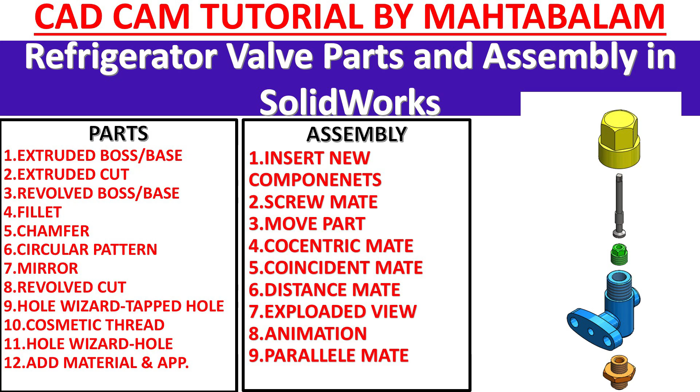In this tutorial, we are going to create an assembly of a refrigerator valve. We will create each and every part and assemble at the end, and we will also do some exploded view animation in SolidWorks.

Let's make the assembly of the refrigerator valve in SolidWorks. This is the assembly. We will create each and every part, and at the end we will assemble. We have 5 parts: body, valve seat, spindle, gland, nut, and cap. So we will start with part 1.

All dimensions are in millimeter. Part 1 is the valve body. We have one view, then a section view, section AA. You will see the direction. Then this is the back view.

So we will start to create this first. Let me make this upper body. This outer diameter, how much? Here you will see 20, and you will see distances 0, 18, 32, 44. So these lengths total 44. If you observe from here, total length is 64. So 44, and from this point to here, 20.

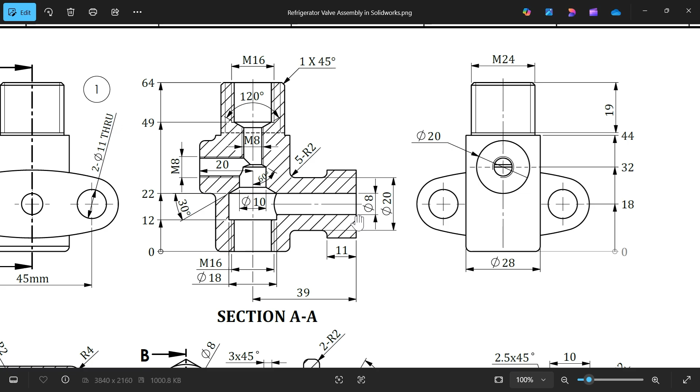So we will create with the help of... then on the back side we will extrude this one. Which one? This one, 20 diameter. You will see the gap from the center line is 20. And distance 0 to 32, see, then let's do this first.

Now, front plane sketch, we will use the revolve boss base feature. Straight, little step, and connect. Press escape key to get out. Make this line a center geometric line.

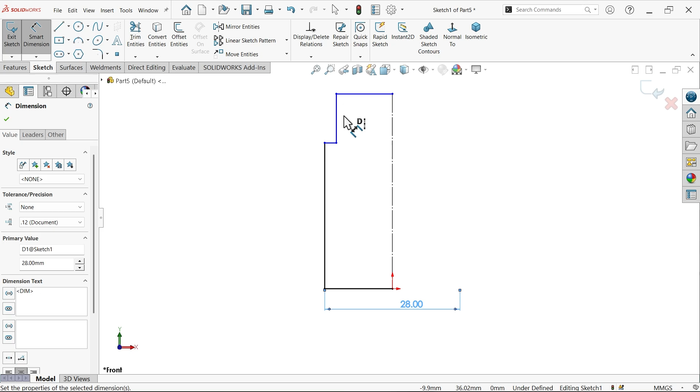Now let me define. If I keep it outside, it will show you the diameter: 28. Similarly for this one, 24. Now the total length shows 64. Now this length is 44.

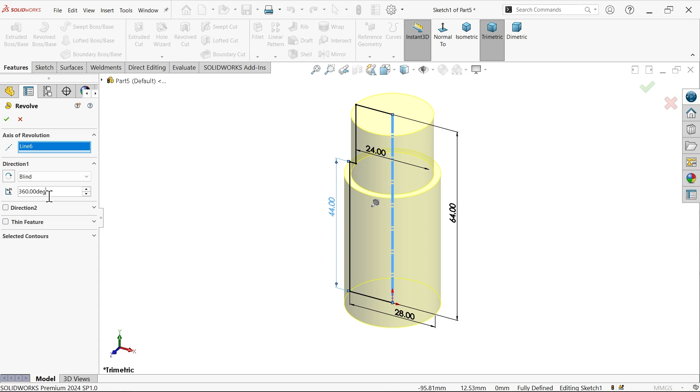Now let's go to feature and activate the revolve boss base feature. I want to add material. Due to this construction line, this profile is open, so we have to choose yes. The system asks, would you like the sketch to be automatically closed? Say yes. Now look, by default the system took this center line as the axis of revolution. Now we are going to add material complete 360, so here you have to apply 360 degrees. Direction, anything.

Okay, now let me uncheck real view. Front plane, sketch, circle. Now here we have a 20 diameter circle. Smart dimension: 20, and distance given 32. Look, the drawing is still not defined, meaning we have to apply some more constraints. So select the center point, hold shift key, select this origin point. Now let's make this vertical.

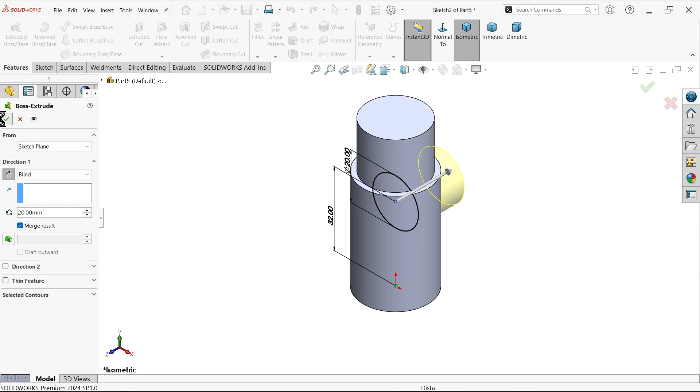Go to feature, extruded boss base. Now here I want to add material. This length of material is 20 millimeter, but I am going to add it on the reverse side. So see the arrow, just click reverse direction. See, the material moves to the back side.

And after this we have to add, see, there is one threaded hole, M16. Now let's first create this one, 18 diameter. See this diameter, distance 0 to 12, 12 to 22. Then there is one tapered view, 30. Now this one is 10, this is important.

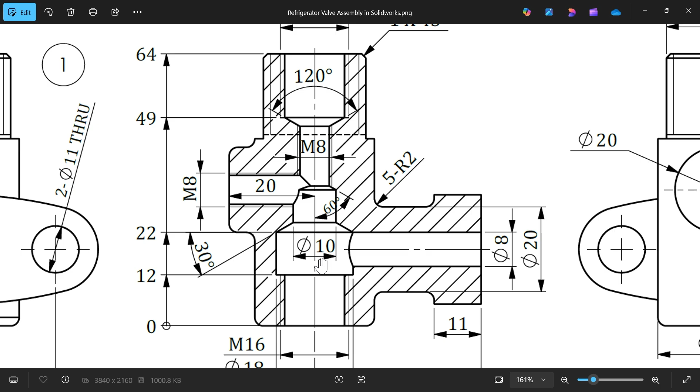Okay, then one more thing here, M8, and this is 60. For M8, this is ISO standard, so 6.8 mm hole for M8. If you want to create the first hole, then we will create M16.

Okay, let's create a plane. First reference, choose front plane. Now apply distance 39. Okay, now select plane one, sketch. Now I am going to first draw a center line.

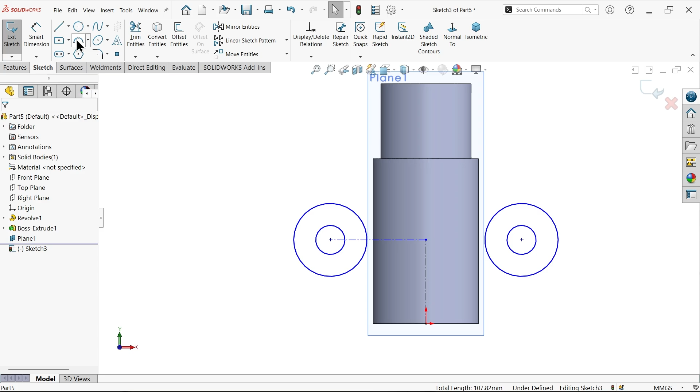Now activate circle, let me draw two circles. Mirror entity, now select both circles, make sure you selected copy, mirror about this one. Now again select here 3-point arc, connect this one to this one, press escape key to get out.

Now make relation: select this arc and select this circle, tangent. Similarly do this side: select arc, circle, tangent constraint. Mirror entity, select this entity, make sure copy, and select this line. Now do one thing, trim entity, power trim and trim this one. This is an unnecessary line, we don't need this. Now we have a structure.

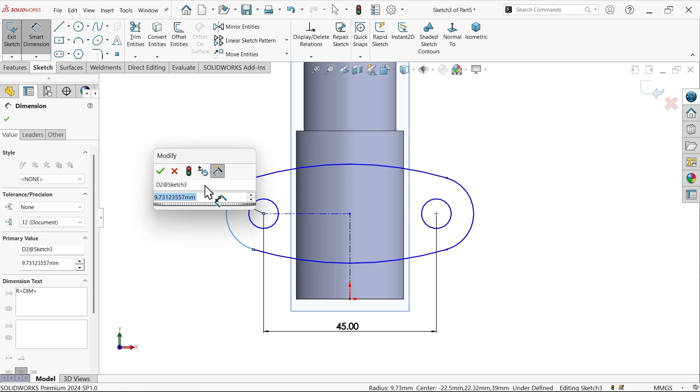Let's apply dimensions. First center dimension 45, outer radius 10. Now length 18 millimeter. Now this one 100 millimeter, 11 millimeter. Look, the drawing seems fully defined.

Go to feature and activate extruded boss base because I want to add material. Now look, this is important: the material is going the wrong side, so reverse. Here apply 11 millimeter. Say okay.

Now select hide. Okay, this diameter 20 we have to add with this, then we will create this one. I am going to select this face, sketch, circle, smart dimension, the diameter goes to 20 millimeter. Now we have to apply a center line: select the center point to this, press escape key to get out. Now select this one vertical, select this line horizontal. Look, it seems fully defined.

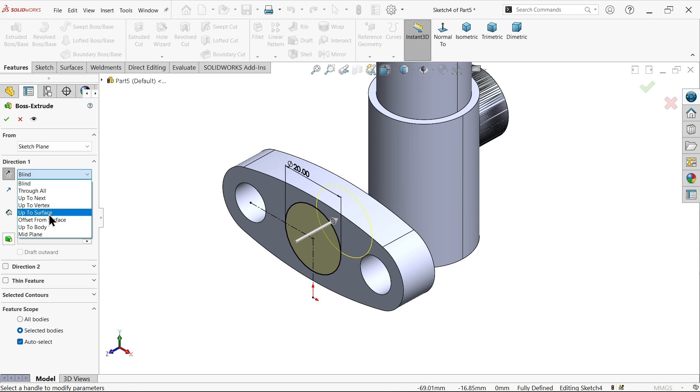Extruded boss base. Make it reverse, and here I am going to choose up to surface. Select this body. Okay, look.

Now I want to add some hole inside. So which plane? Right, front plane, sketch. Let me add one center line across the midpoint to the origin point. Press escape key to get out, activate line tool.

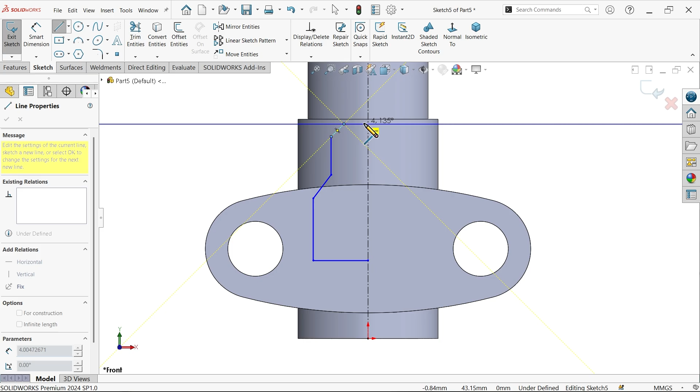Connect, exit. Now I am going to define this diameter: 18 millimeter. Similarly for this one, 10. And this hole going for M8, so for M8 in ISO standard, hole size is 6.8. Okay, that's fine. Now distance from here to here.

Now from here to here it's 32. Now let me drag down. Smart dimension. Now in drawing it's given angle 60.

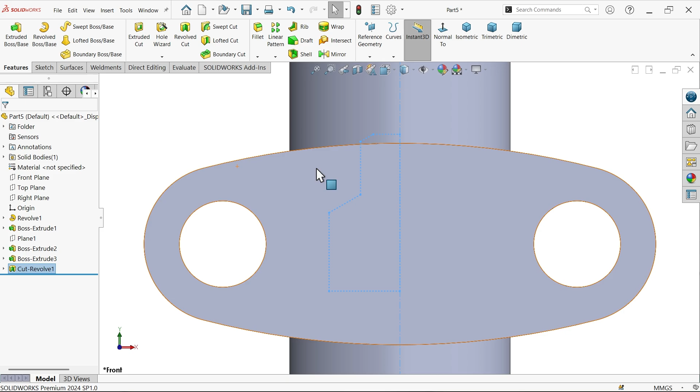Now let's activate revolve cut here. Due to this construction line we have to apply, yes, because I want to close this profile. Now you will see the preview. This center line selected as axis, and I want to remove material 360 degrees, a complete hollow. So, okay, if I am going to see front plane section view, okay, see the material is removed.

Now let's add hole from bottom to next, M16, and from top M16, but depth of hole you will see here. See, 19 millimeter is the thread depth. Oh, not 19 millimeter for this one. You can calculate from here: 15 millimeter, 49, 64 minus 49, 15 millimeter.

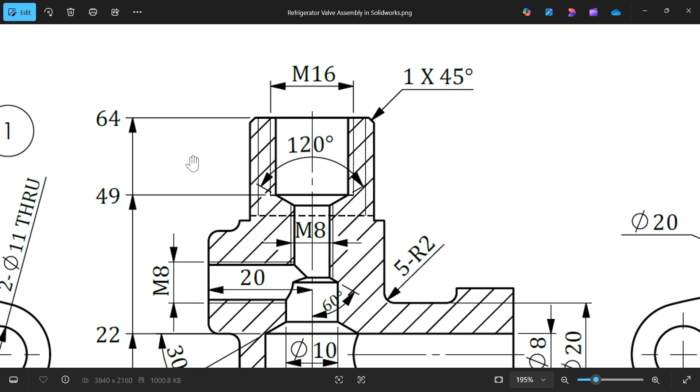Go to hole wizard, here choose straight tapped hole. See, straight tap, ISO standard. I don't want to make a throughout hole, so I am going to keep bottoming tapped bottoming hole, and here I am going to apply M16. We don't have clarification on pitch, that's why I am going to choose. Now here make sure angle keep 120 degree.

Now this is going to be, let's say, next, with thread call out. Position, select this face and place here. Press escape key and just rotate and see the preview. Okay, now let me see. Okay, now this is available.

Now let's come here. Again hole wizard. Now same hole, ISO standard M16, but here we have to apply depth. Keep end condition blind and depth here 15 millimeter up to shoulder, not up to tip. And this is thread. Thread how long? 15, same.

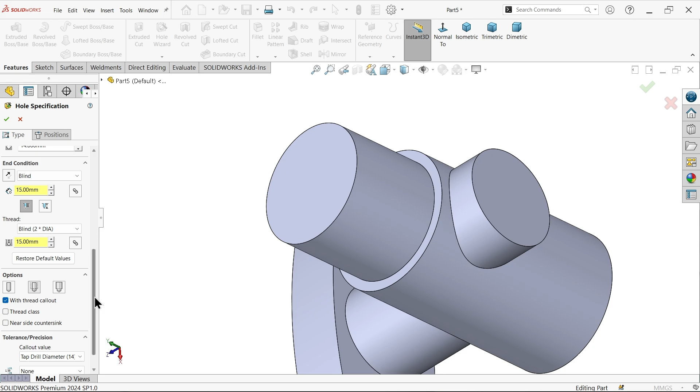At bottom with thread call out, it will show you cosmetic thread. We will see. Okay, position, select this top face. Place at center, press escape key. Okay.

Let me do one thing: section view. Okay, see, now these holes created for M8, so we will apply thread here. Hole wizard, ISO standard tapped bottoming hole. Here I am going to choose M8.

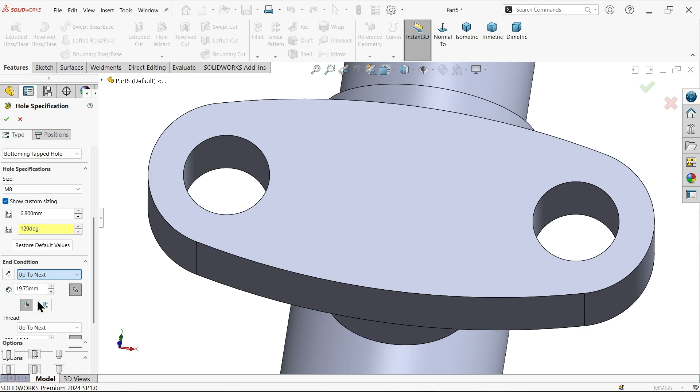Keep angle 120 degree. Now this is going to be next. Position, now from enter from bottom, select this. Now place at center, press escape key to out. Now let's say okay.

Options, document property and detailing. Shaded cosmetic thread, image quality, okay it's already higher. Now front plane section view. Okay, keep color.

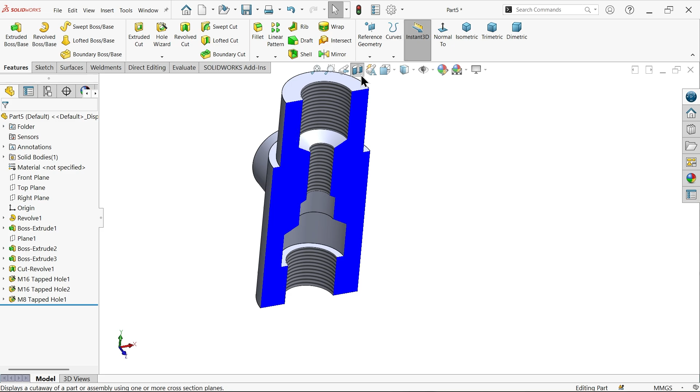See, we applied threads all over. This is what we need. Exactly. Now we already applied hole. Now you will see there are radius in 5 corners: 1, 2, 3 and this one. And there is a chamfer, 1 into 45 degree. Okay, and here one 8 diameter hole up to this, and similarly M8 thread up to this.

Now select this face, sketch. Now here we have to create a hole, only hole, not threaded hole, simple hole, M8. Okay, if I'm going to, which one? Now see, this is sketch to show.

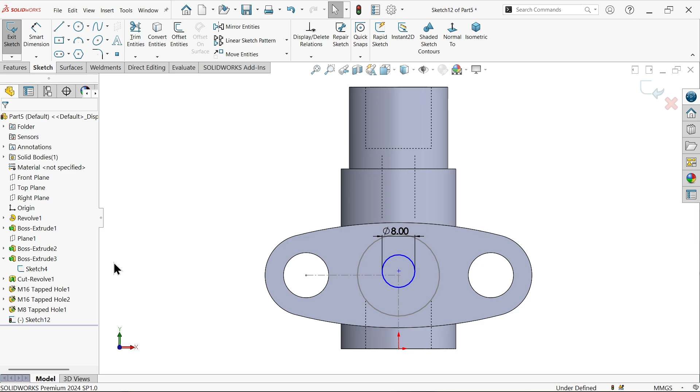Look, we already created some, so select this center point and this one, coincide. Look, this is fully defined sketch. We just use previous sketch, sketch 4, because this is exactly at the center of this line. Now you can hide, click this sketch, hide.

Go to feature and activate extruded cut, because I want to remove material. But how? Here choose in direction up to next. Up to next means this is going to cut only up to the inside wall.

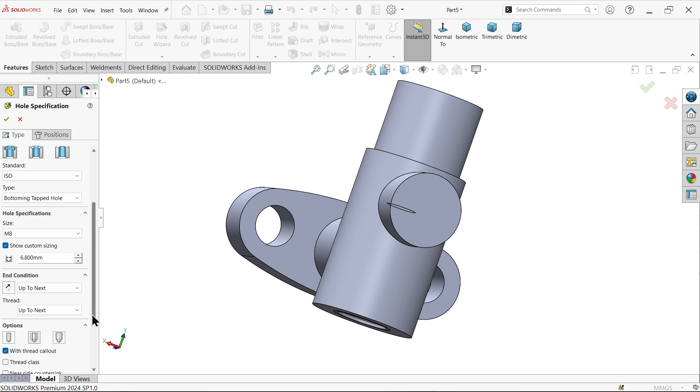Okay, let me add here hole also, hole wizard. Tapped straight tab, ISO standard bottoming tapped hole M8. Position, select this face. We have to place at center. Press escape key to out. Just look at this, okay, this is going up to.

Okay, now which plane? Right plane, section view, normal view. Okay, look, we added one thread from here, we added hole from here. Now our job done.

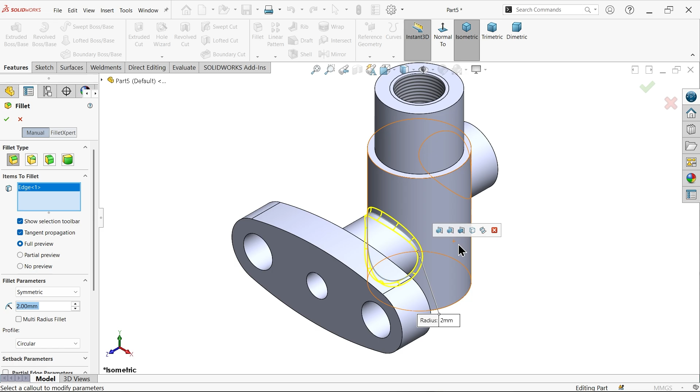Simply add fillet, fillet type constant size, radius 2 millimeter: 1, 2, 3, 4. Okay, this corner also have radius 5.

Similarly, chamfer. For chamfer type, angle distance, the first one. Now here 1 into 45 degree, and I'm going to select this corner.

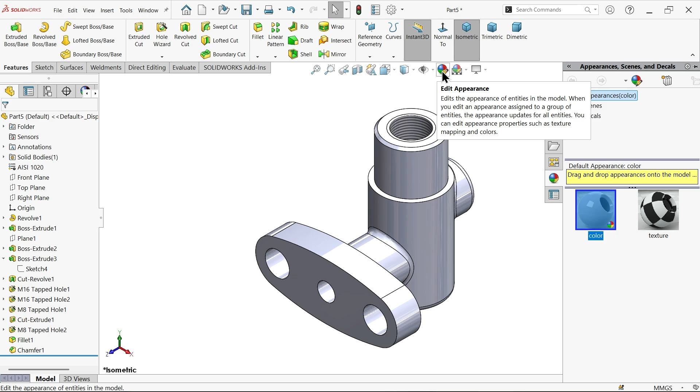Now material, let's say it's given, edit material, steel AISI 1020, apply, close. See, but I'm going to add some different color, so edit, and let's say this one.

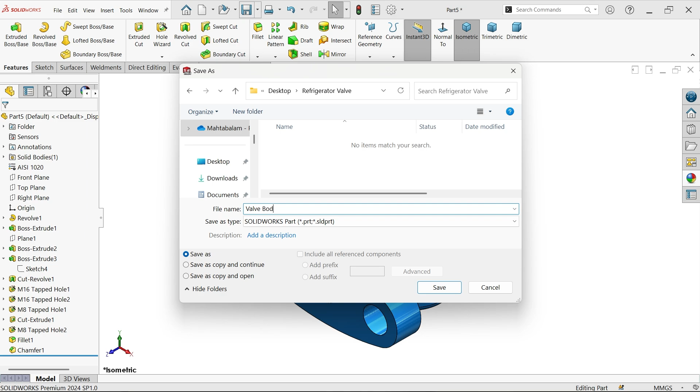Okay, that's fine. Okay, now let me save this one. Go to desktop, create new folder, refrigerator valve, enter. This is part 1, valve body. Let me save here. Now let's make part 2.

Which one is part 2? Part 2 is the bottom one. This is called valve seat. Okay, this is the part 2. Let's try to create all body together. 28. Okay, I'll tell you how. From 0, 15, 21. This way we can apply dimensions.

32. Now this one 16, so outer diameter 16. This is also 16. 28, this is hexagon shaped diameter. Then throughout there is 8 diameter hole, at end 120 and hole depth 10, diameter 10. Then there is a chamfer 3 into 45 degree. Okay, let's do it.

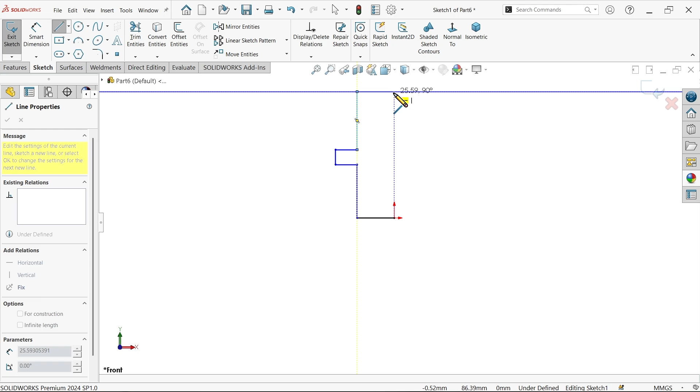New, here choose part. Now I'm going to choose front plane, sketch, activate line tool. Press escape key to out. Make this one center line. Smart dimension. 16 millimeter. Now total length given is here.

Let's use one more option. Now see here, vertical ordinate dimension. First you have to choose one base. So I'm going to select this one. Okay. The drawing actually is from this direction, so delete this one. We will start from here.

This is 0. The second option, double click and you can change the dimension. 15. Select this one, double click the dimension and you can say 21. And the last option, double click, 32. Select OK. Now choose smart dimension. This one I am going to make 35 because we need to cut one shape.

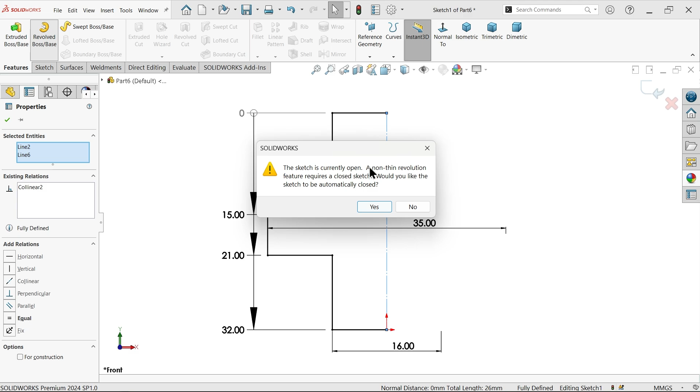Select these two lines, make relation collinear. Now I want to add, so activate revolved boss base. Due to this construction line the profile is open, so system asks, would you like to close? Say yes. By default, system took this center line as the axis of revolution. I want a complete circular body, so you have to apply a complete angle. Okay.

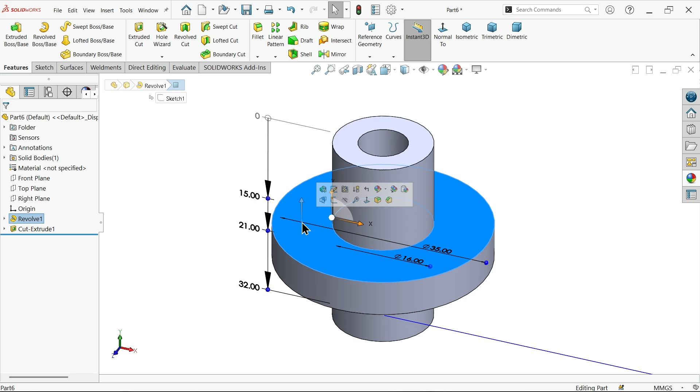Now hole 8 diameter, so select this face, sketch. Eight. Activate extruded cut. I want to remove material, so here I am going to choose either up to next or through all. Similarly, I am going to select this face, sketch. Now I am going to add polygon. Now add this material.

28. Now select this one, vertical. Extruded cut. Now select here, let me choose through all, and I am going to choose flip side to cut. See? If I select through all, the arrow moves this side, say okay. And here we go.

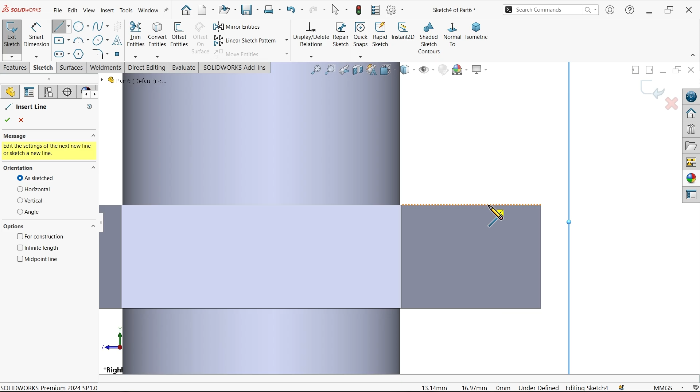Now, back side here we need to, let me check, right plane, sketch, activate line tool. This is 2 millimeter radius. Go back to the point and see the line is converted into arc. Now press escape key. Select these 2 points, vertical. Smart dimension, 2 millimeter. Center. See, there is a midpoint.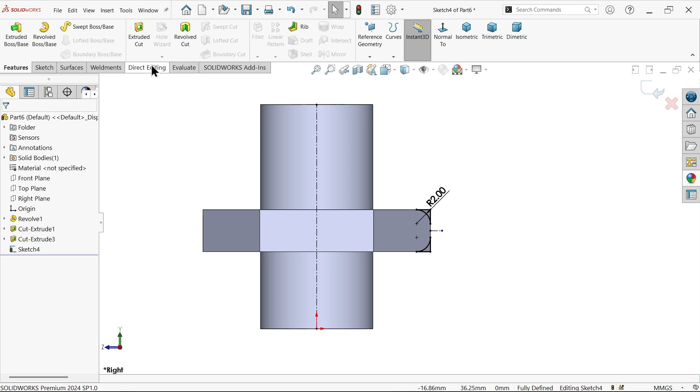Mirror entity. Now select all this. Copy, select this mirror line. Let me select one center line or midline. Activate revolve cut feature. Here I am going to select this line. I want to remove material complete 360, so you have to apply 360 and see. Oh no.

Here we have to apply thread, so we have to apply insert. Go to drop down and you will see annotations, cosmetic thread. Now here choose standard ISO, machine thread, M16. Blind depth 13. Now choose circular edge, so I am going to select this edge. Okay.

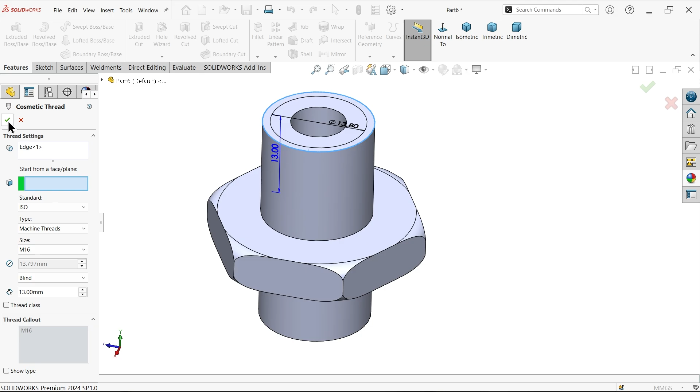I'm going to detailing. Quality also I'm going to increase; it will increase your file size, but image quality becomes good. See. Similarly, again annotations, cosmetic thread, select this edge, everything same, ISO standard, machine thread, M16. Now here depth given only 10 millimeter.

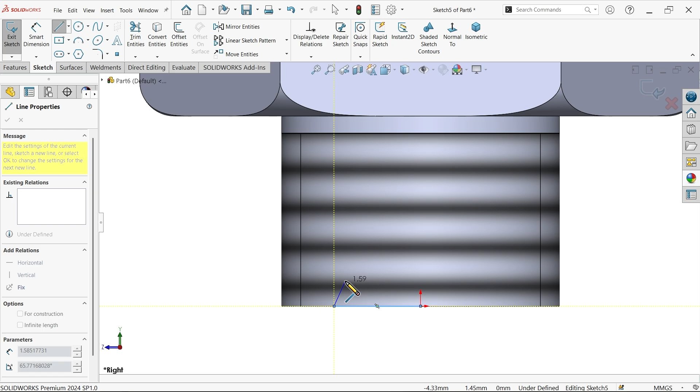Now right plane sketch. Here we need to create one hole. Select this point. Smart dimension. Diameter shows 10 millimeters, so radius 5. And total angle given 120, so this angle is going to be 60.

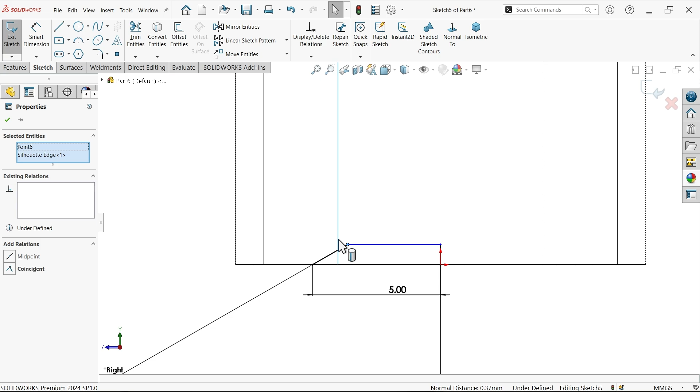Okay. Now this hole is going to match with this. So select this line and this one, coincident. See, it seems fully defined. Revolve cut. For axis, I'm going to select this line. See, complete 360 degree, axis already selected. That's it.

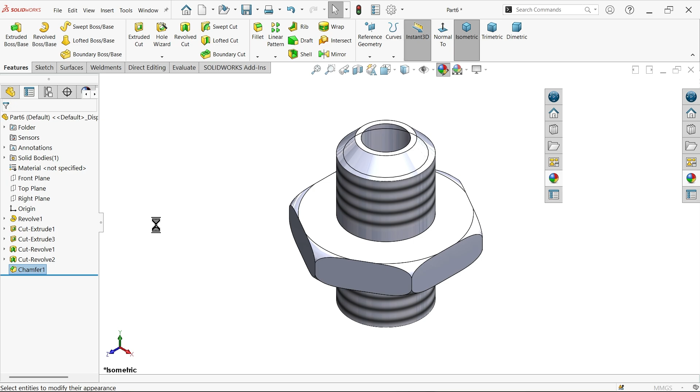Now top side chamfer 3 into 45 degree. Keep angle distance, tangent propagation, select this edge. Here choose part, select this one. Remove this chamfer. See, this is going to be fixed something like this, okay, that's fine. Let me save this one. Valve seat.

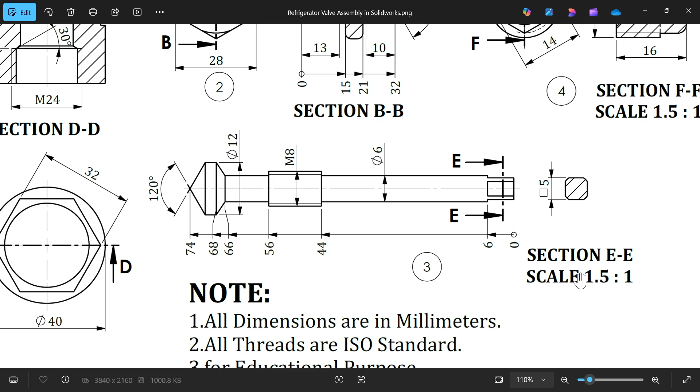New. Now let's make the third part, this one. This is the spindle, scale 1.5 compared to the others. Total length 74. There is one square, you will see this is section E. This is square, 5 square, up to 6.

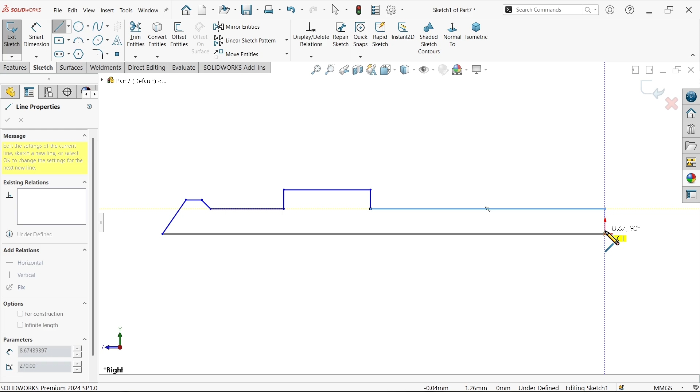Then this diameter 6. Then there is M8 thread here, 44, 56. Remember these dimensions. Then this corner 66, 68, 74, 120. This diameter 12. Okay, let's do it. Right plane sketch, activate line tool, start from here. Press escape key to out.

Let me make this center one construction line, smart dimension. Let me define first diameter. 6. For M8 thread, make it 8. Now this one 12. Now I am going to choose horizontal coordinate dimension. First this is the reference, so make it 0. Second one, double click, 44.

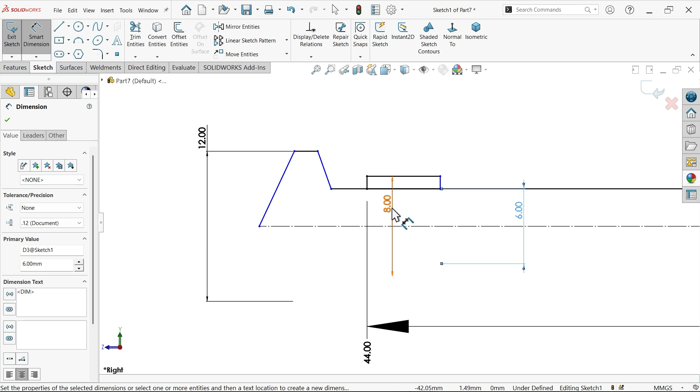Okay, this is not going to show properly. So let me drag this one. Okay, let's define this angle. Normal smart dimension. Select this point and this one. If you calculate, this is going to be 30 degree. Fine.

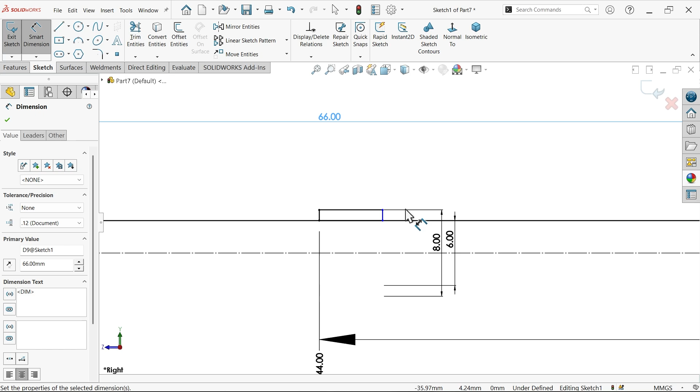Now distance from here to here, 68. From here, 66. Okay. Now let's move this one. Okay. Now the things go online. Now this one from here to here, 56. Okay. Now total.

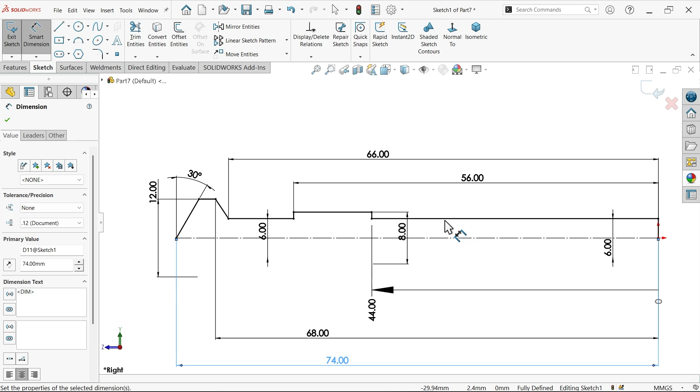Revolve boss base. Due to this construction line the profile is open, so you want to close, say yes. Center line, see this center line, construction line selected as the axis. I want to add a complete 360 body, so we need to apply 360 angle.

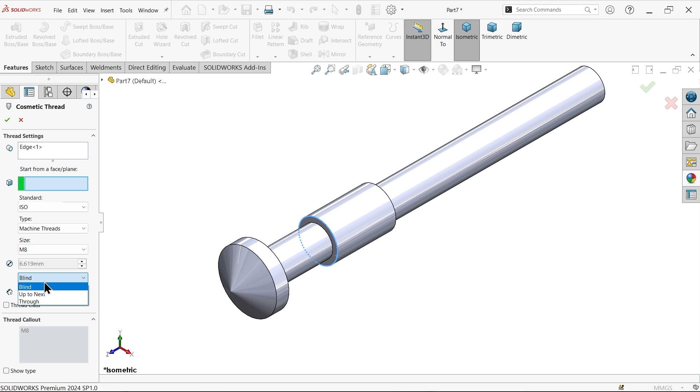See here, insert, annotations, cosmetic thread, ISO standard M8 thread. Now select this edge or choose next. If you don't see it, again go to options, document properties, detailing, shaded cosmetic thread, image quality, something like this. Okay.

Select this back, sketch. Now draw one circle, square. Press escape key. Now select both the vertical and horizontal line, make relation equal constraint. Okay. Smart dimension 5.

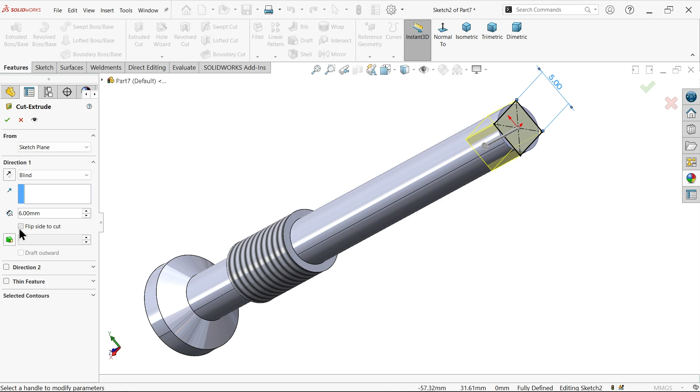Extruded cut. I want to remove material. Now here depth only 6 millimeter, but flip side to cut. You will see preview. See this yellow portion going to remove. See.

I want to add spindle valve. New part. Now what next? Part number 4. Okay, what is the name of part number 4? Gland nut.

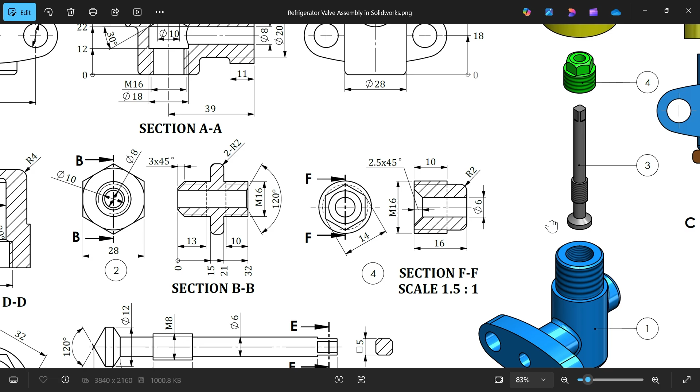Okay, this is M16, depth 10 millimeter, then total depth 16, and center to center 14. Okay. Then there is a hole 6 dia, chamfer 2.5 into 45, corner radius R2. Okay, let's do this.

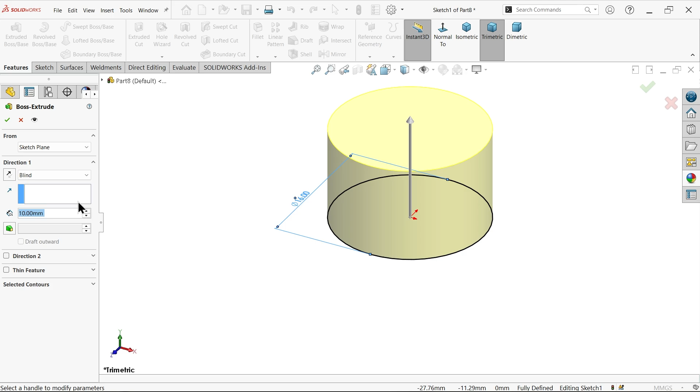Top plane sketch, activate circle, make it M16, 16 diameter, extrude total length 16 millimeter. Okay. Now from here a sketch, now the diameter 14.

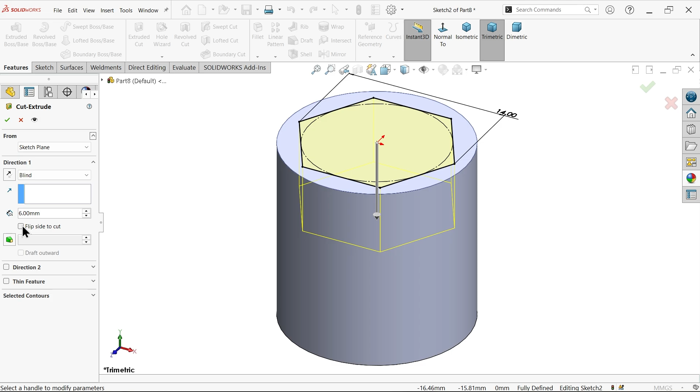Let's make this one horizontal. Extruded cut. Here keep end condition blind. Depth 10 minus, it's going to be 6. 16 minus 10, 6. Flip side to cut. Okay.

Let me select right plane, no. Front plane, sketch because there is a curve. So go back to the point and see the line is connected, become curve. Press escape key. Now let's make these 2 points vertical. Smart dimension 2 millimeter. Okay, I want to add only here.

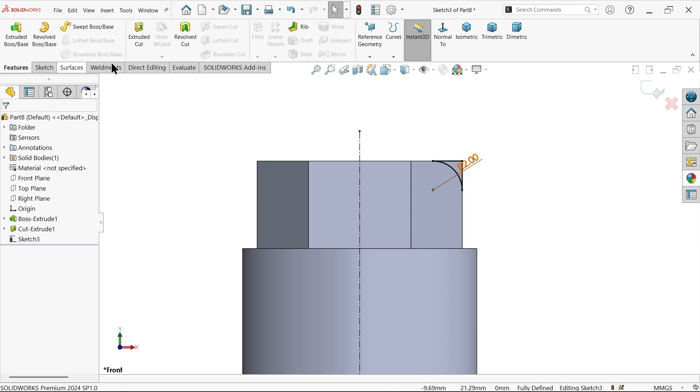So let me draw one center line. Center line, okay. Revolve cut. Now see, by default, system took this construction line as the axis of revolution and angle applied 360 degree. You will see the preview. See.

Let me make a hole. Hole wizard, keep customize, simple hole, ISO standard, drill size. Now from here you can select your hole. Six, up to next. Position, select this face, place at center, press escape key to out. Chamfer 2.5 into 45, select OK.

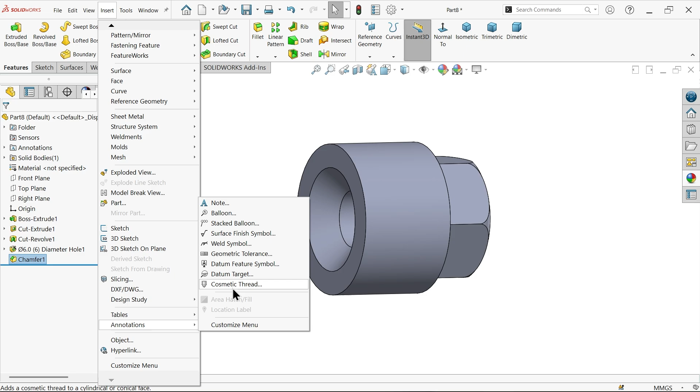Now here we need to add a thread, so simply go to insert, annotations, cosmetic thread, ISO standard machine thread, and here let me choose the size M16. Okay, keep next. Let me select this edge. Okay. This is gland nut.

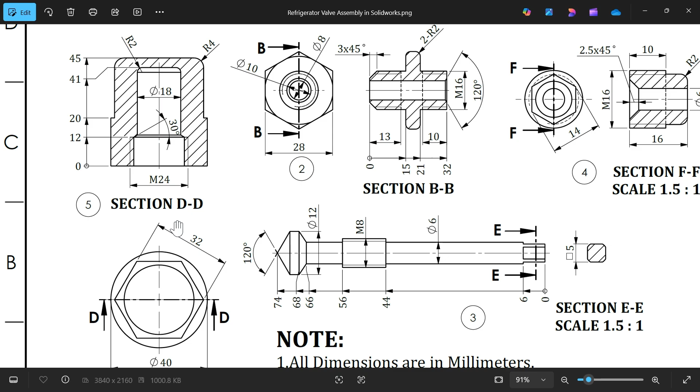New part. Now this part we've done. What is next part? Okay, this is the 5th part. Outer diameter you will see here 40. Okay. Now 12, 20, 41, 45. Total length distance from here to top 45. Okay. You will see here 32, 40. Okay, so we will make total corner radius R4.

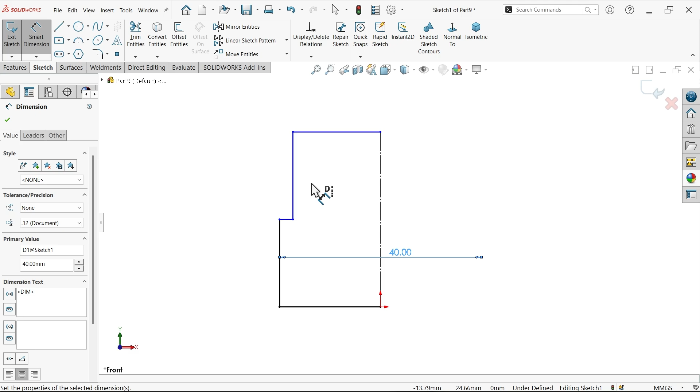Okay, do one thing. Let's try this. Line, front. Press escape key, select this line, make it construction line, smart dimension, keep diameter 40, and why we need to do this? Make it one only. That's simple. 45. I want to add material, close, yes. Revolve boss base, okay.

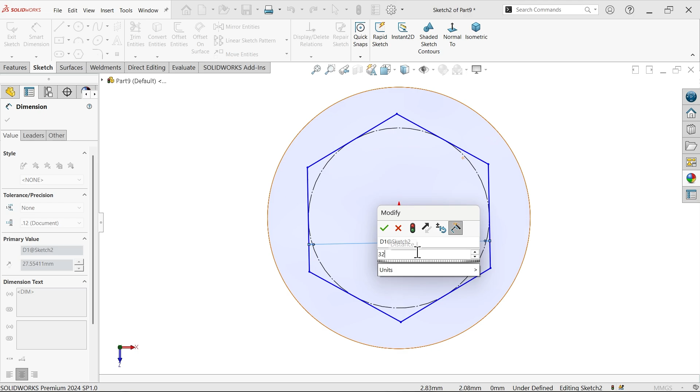Now select the top face, sketch, polygon, smart dimension, and let's make this one horizontal. Extruded cut. Now make it depth 25. Flip side cut. See, I want to cut outside material. You will see this arrow.

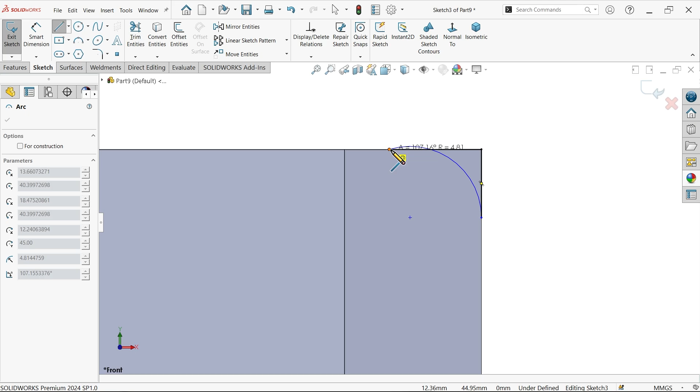Now, which one? Front plane sketch. Let's make corner R4. So activate line. Go back to the point and see the line is converted into arc. Close. Now select these 2 points, vertical, 4 millimeter. Okay. Now draw one center line. Mid line.

Feature, revolve cut feature. Look, by default system took this center line as the axis of revolution, and this is going to cut complete 360. You have to apply angle 360 degree.

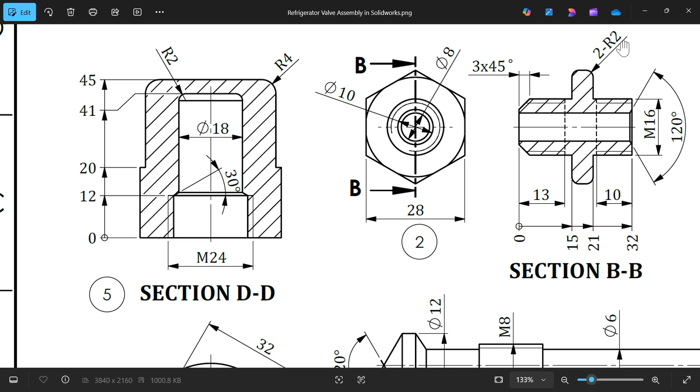Now let's make a hole here. M24, depth 12, thread also up to same, 120 angle, 18 dia. This is 41. Hole wizard, tap, ISO standard bottoming tapped hole. Here choose M24. Now depth here, select angle 120 degree. Okay.

Now 12. Thread also up to 12. Position, select this face, place at center. Press escape key to out and see the preview.

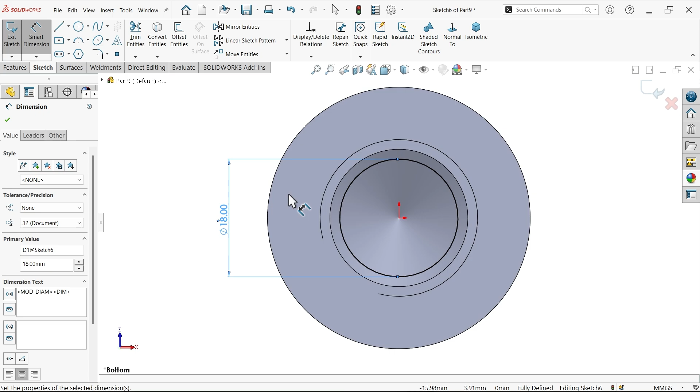Okay, select this face, sketch, circle, 18, and depth of this hole 41 millimeter. Keep end condition blind, depth keep 41 millimeter. Fillet, constant type fillet, here symmetric and radius 2 millimeter, and select the face or edge, no matter. Section view. Okay. Now see the preview, how it looks like.

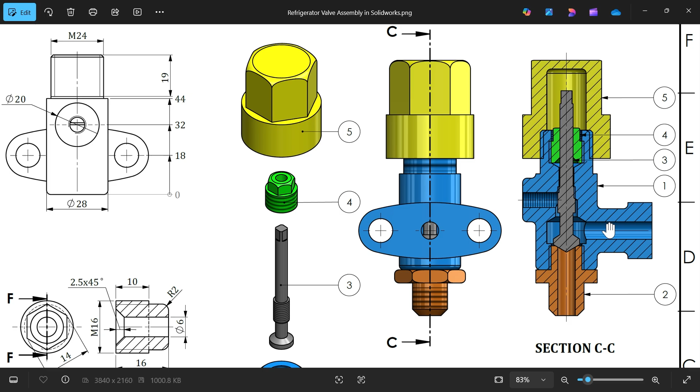Now yellow color. Now save this one, cap. Now see, this is the assembly. You will see part 1, part 2. See, the chamfer is going to be down, and this spindle is going to rest on this. There is a chamfer. Then we will apply this gland nut with this body. Okay.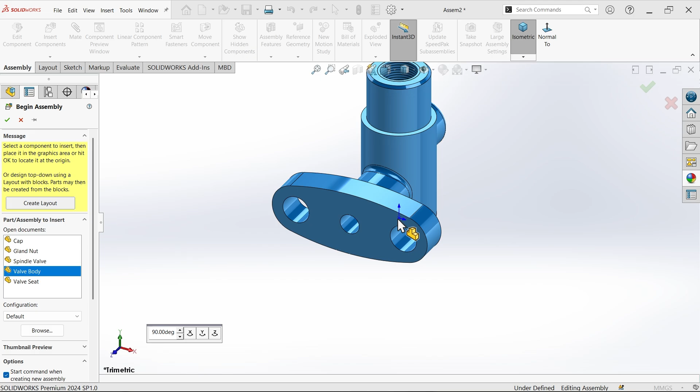Go to file, new, choose here assembly. Okay. Now drop down, and here I am going to activate view origin, because the first part I am going to fix here. So first part valve body. Now keep cursor and see, this is going to fix with origin. See, click. Now the first part is fixed at origin. This is important, otherwise you have to again set this reference or plane.

Normal view. Now let me hide. Now if you right click on part, see float, means this part by default is fixed. It is not going to move. Insert component. Now valve seat. Now see, I want to rotate this one because this chamfer part is going to be downside. So how you can rotate? You will see here X, Y. So click X. See, this is rotated. Again click X. See, this is rotated. Place somewhere here.

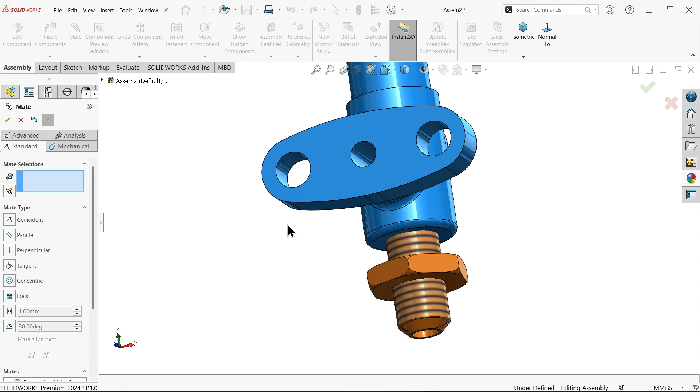Mate. Now select this hole and this one. Concentric relation. Okay. Now just drag. Either you can apply mechanical mate; we will apply mechanical mate on other parts. Simply I am going to fix with this coincident relation. See, now in drawing you will see this face similar to here. So select this face and this face, parallel. Okay, cancel. Select this one, normal view. See.

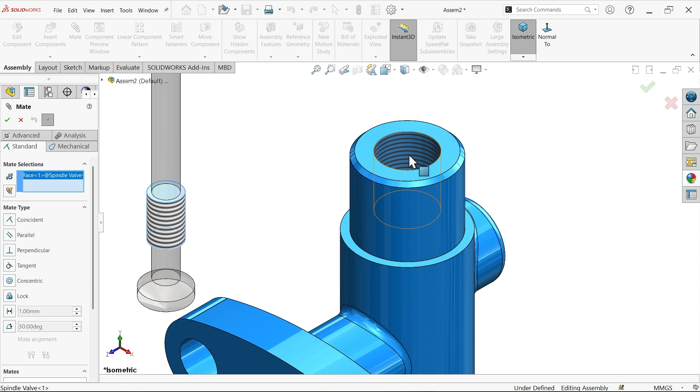Insert component. Now the spindle. Now I want to rotate, so X, click OK. Now I am going to choose mate. Select this one and this one. Concentric. OK. Now let me select section view. Front section view. OK. Now just down, and I want to fix this one here.

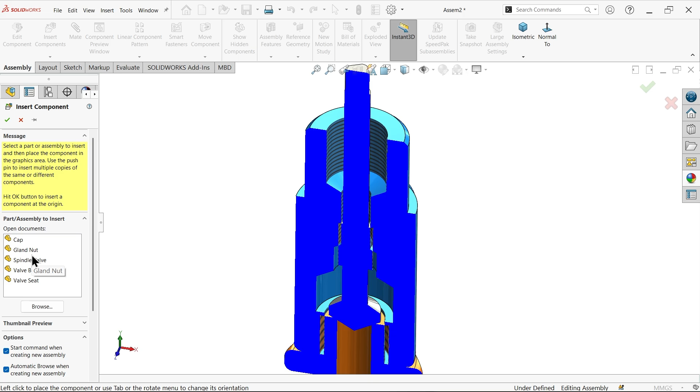Mate. Clear. Select this seat. This one and this one. Both going to fix coincident. Okay. For time being, I am going to fix this. Okay. Now insert component, gland nut. Place somewhere here. Okay.

Mate. Select this one. Oh, not this one. Clear. Now here I am going to apply some relations. Mechanical mate. Screw. Now select this internal and this one. Okay. 1 revolution per mm for the time being. Now go to advanced mate, limit. I want to fix some limit. This face, this face. Come down.

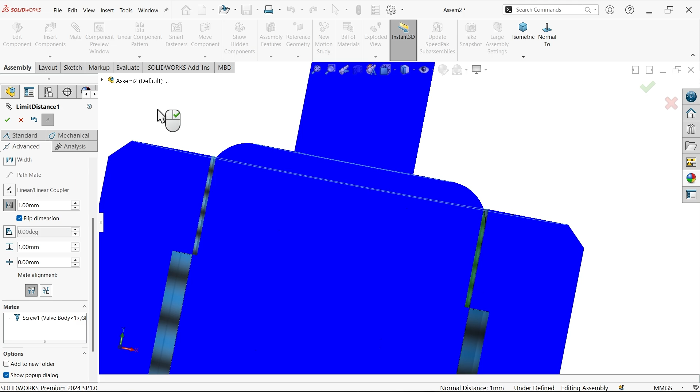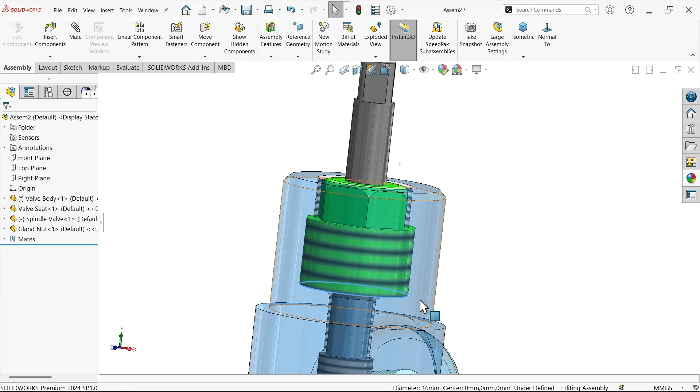Now see these two faces, minimum 0, maximum 20. Here make it 0. See? Now if I am going to rotate, take this up, cancel this one. Now select this one, change transparency. See? This is not going beyond this. See the maximum distance between these two faces. That's fine.

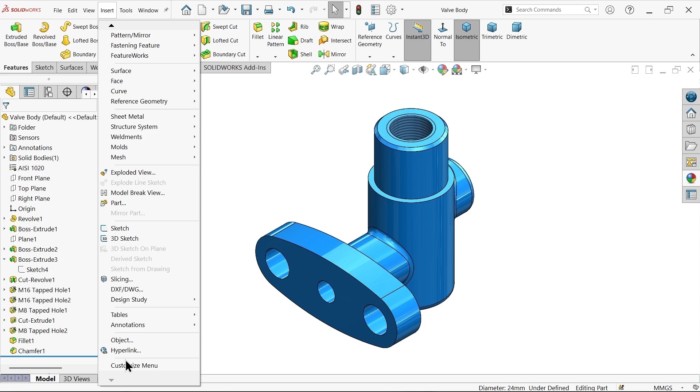Change transparency. Now let's bring next part, cap. Now I want to add here hole. Open part. Now see there is M24 thread, depth 19. Now go to insert, annotations, cosmetic thread. Now select this edge, and here is start face. So I'm going to select this face because we already applied here chamfer. ISO standard machine thread M24 and blind depth 19. Say OK. Now click save.

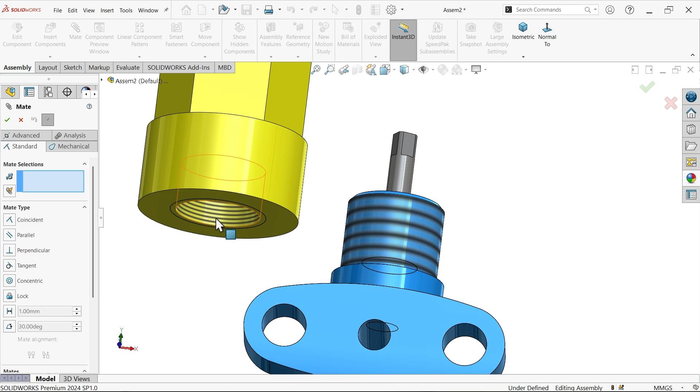Go to assembly. Now you will see mate. Now here I am going to select the standard mate, select this one and this one. Concentric relation. See. Even you can set or you can remove anything, no matter. Now let me first save this one. Refrigerator valve assembly.

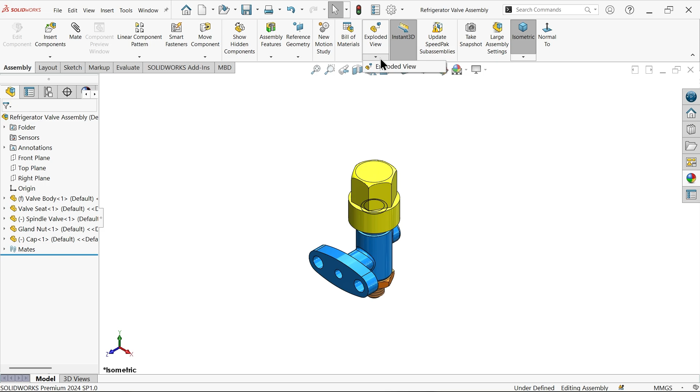Now go to exploded view. First I am going to select this one, take down. Now here select done. Now select cap, drag up to top, select done. Select spindle, drag, done, and select this one. Now we will adjust a little so that it looks better. Again select, take down. If you did more, again select, take down.

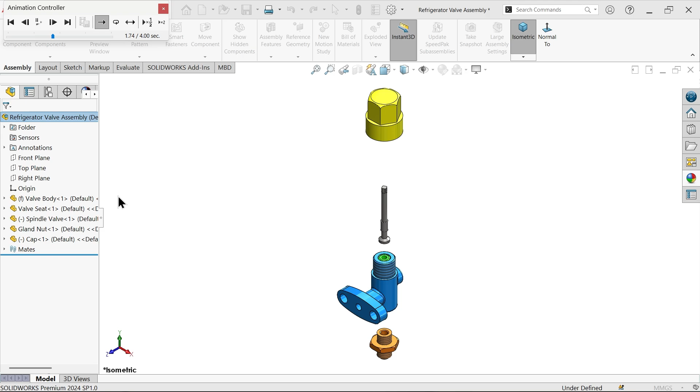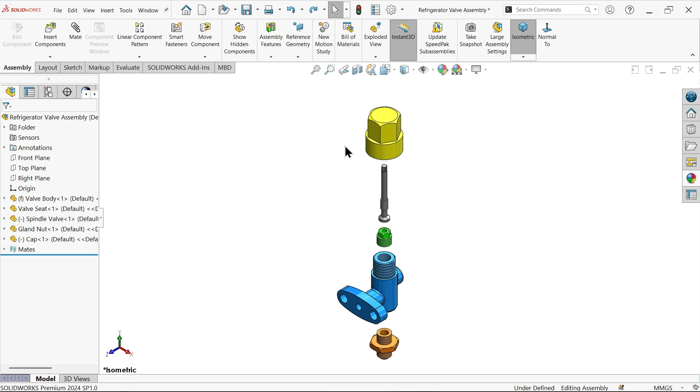Okay. Now right click, collapse. Now right click, animate explode. See. If you want to insert or edit smart explode line, you will see. Uncheck sub assembly part. Now there is a dot line. If you don't like it, just undo the procedure. Even if you want to use explode line sketch, you can do it. But that's it. Okay, let me do one thing. Collapse.

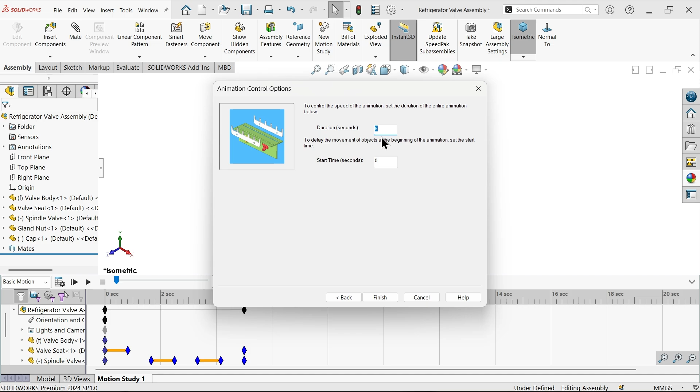Now here choose motion study. Select this one. Now here I am going to animation. Before going there, let me choose basic motion. Animation wizard. Explode. Next. 5 seconds. Let's make it a little faster. Finish. Again select here animation wizard, collapse. Next 5 seconds and starting 5 seconds because we already did the explode. Calculate. Okay, it covers all the things. Okay, we made some mistake because this step also covered here because we did it in our assembly.